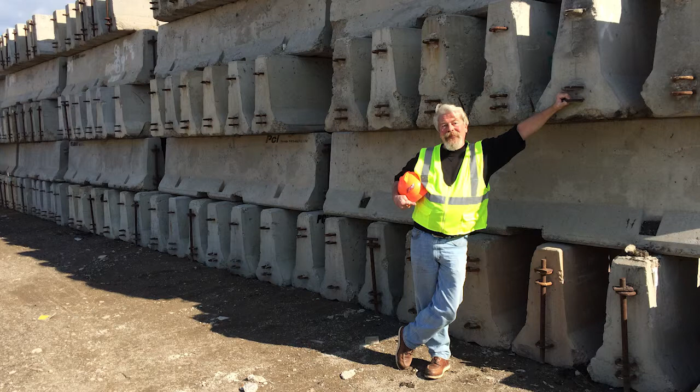Please enjoy the upcoming presentation and take ownership of these three disciplines: safety, environmental, and quality. Please feel free to comment on these topics as we continually work together to improve the design-build process. Thanks.

The design-build construction manager for this project is Rachel Wiedig.

PCiRoads is dedicated to providing MnDOT with a project that is designed and constructed in accordance with the Trunk Highway 2 Erskine Concrete Design-Build Project Conform Contract. Our goal is a project that is safe, buildable, environmentally sound, maintainable, durable, and functions for the traveling public.

To accomplish the above goals, we are committed to emphasizing the importance of a quality project to all project personnel. The quality management system establishes quality management processes and procedures, integrates quality goals of design and construction, defines standards and procedures for quality management, assigns the responsibility for specific quality management functions, establishes a process where quality is built into the product. All persons working on this project are responsible for project quality.

Success will be defined as providing a quality project, providing the understanding of quality, and project certification and acceptance.

Responsibilities: Contractor and all individuals working on the project are responsible for the construction quality of the project and for complying with the project scope of work and their quality manual. MnDOT is responsible for performing construction quality acceptance verification testing and inspection and auditing of the contractor's management system.

What is project quality? Constructing a well-designed plan means building according to the Release for Construction Plans, or RFC. Field Design Change, FDC, is a tool for correcting plan errors and making changes as necessary to match field conditions and documenting the changes. Examples can be moving catch basins to work around conflicts found in the field, moving rebar locations to allow for better placement, the addition of a cutoff drain to intercept water from a sand seam.

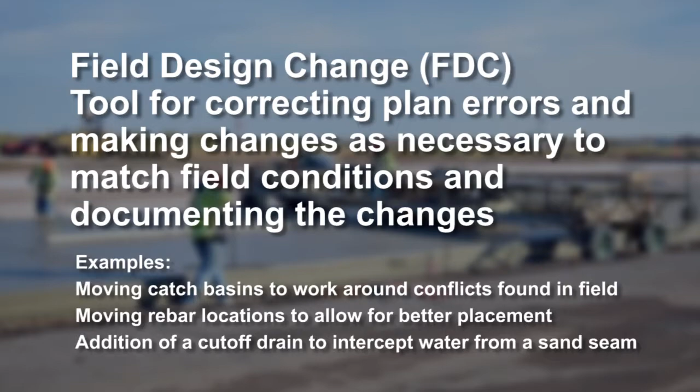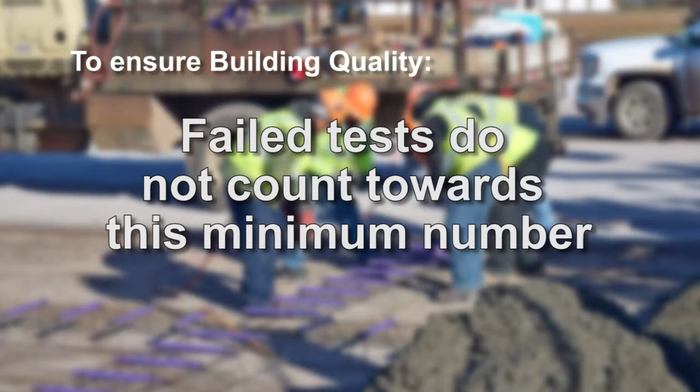To ensure building quality, all construction must adhere to MnDOT specifications and standards. All field and laboratory testing must be conducted and reach the minimum number of passing tests. Failed tests do not count towards this minimum number. Certify supplier material quality standards prior to incorporation of the material. Follow RFC plans. Communicate plan errors and resolve them at the appropriate level.

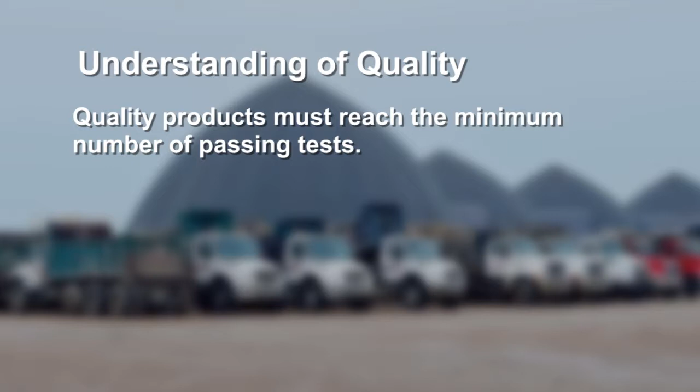Understanding of quality: this means the owner knows a quality product has been provided, and this is as important as quality itself. Quality products must reach the minimum number of passing tests. Testing frequency is contractual. The minimum number of tests to be taken is not optional. Failed tests do not count as a test. Any failing are documented and resolved.

Tools for providing understanding of quality include allowing for testing and inspection of all products to assure quality status. Quality incentives are in place to provide a superior product. An openness to communicate with the owner, MnDOT, helps facilitate understanding of quality.

The quality management process will perform sufficient inspections to assure compliance with specifications and the MnDOT schedule of materials control. This includes assuring that all personnel performing work on the project have the necessary experience, certifications, skills, education, and training to perform work affecting project quality.

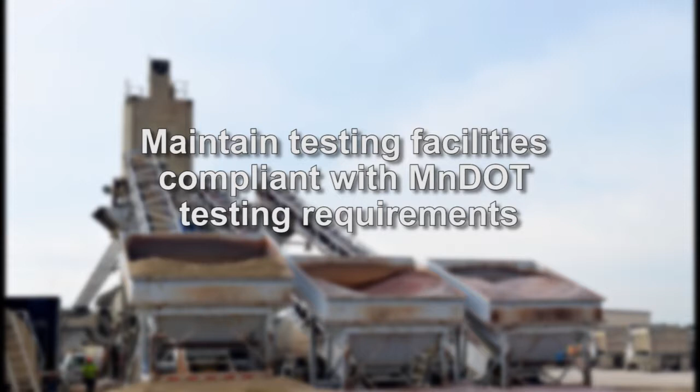Maintain testing facilities compliant with MnDOT testing requirements. Document purchase, receipt, storage, and protection of the materials on the project. Testing and inspection records are to be maintained and made available to MnDOT. Documentation and resolution of non-conforming work. Monitor post-design changes working with the construction team, inspection staff, and designers with the development of as-built drawings.

The foreman is the most important component of project quality. They must make sure that construction goes according to plan and specification, including adherence to MnDOT specifications and standards, achieving passing material test results by knowing all material types and placement, and using the right materials in the right place.

Request testing when needed or appropriate. Monitor moisture and density control throughout construction. Identify potential conflicts in plans for potential critical activity points.

A critical activity point is a specific point in the construction process at which further activity associated with the deliverable is suspended until formal acceptance of the interim product is obtained. Some examples include subgrade density and tolerance checked prior to placement of aggregate base, aggregate base density and tolerance checked prior to paving, and concrete forms and reinforcing steel checked prior to concrete placement.

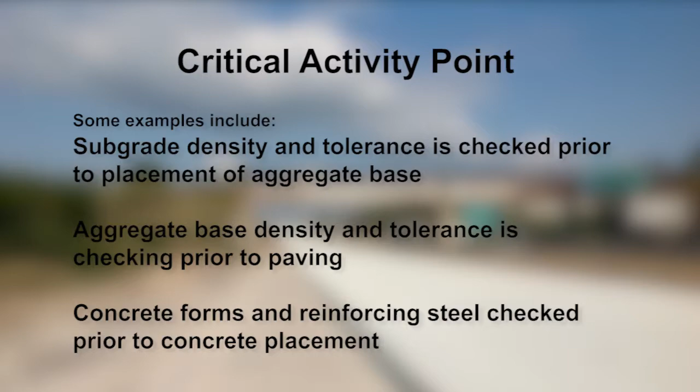The foreman will review critical activity point requirements with the critical activity point manager prior to verification inspection. They will correct any areas with failing test results and correct any items not meeting project requirements, such as rebar placement, loose rebar, or soft areas in the subgrade or base.

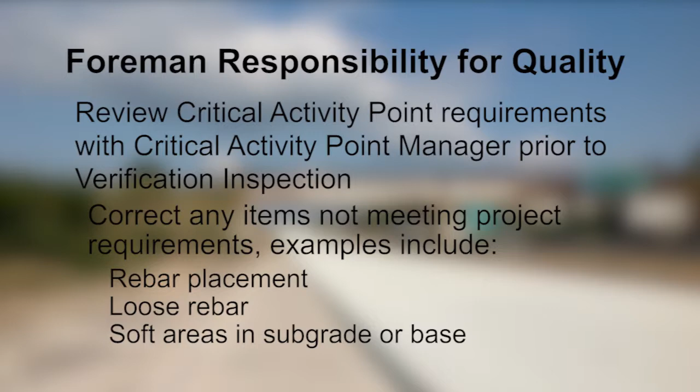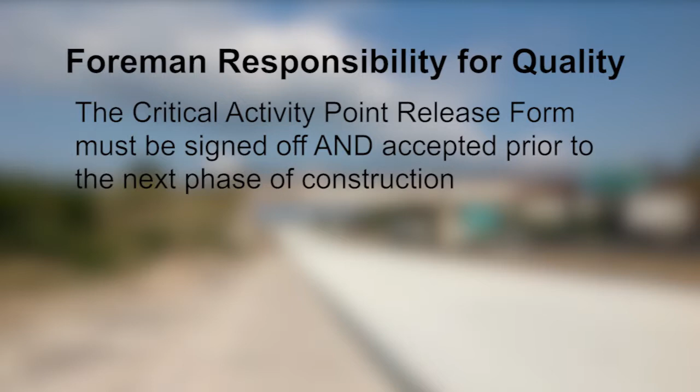The foreman will also communicate with the critical activity point manager and MnDOT verification. The critical activity point release form must be signed off and accepted prior to the next phase of construction.

Critical activity points must be signed off and accepted by the following: the Design Build Team Critical Activity Point Manager (CAPM), the Design Build Team Foreman in charge of the activity, and the MnDOT Verification Representative. All must agree that the critical activity point requirements have been met.

Materials delivered to the project are a critical activity point and must include the appropriate documentation prior to unloading. They also require inspection by the CAPM or quality inspector prior to incorporation into the project. Remember, quality is everyone's responsibility.

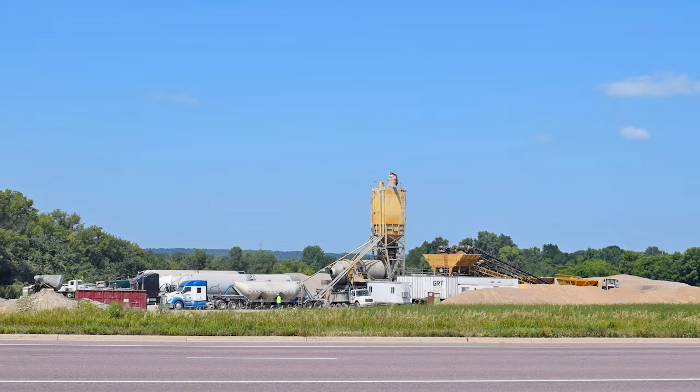The success of this project will not only be measured by how well we reconstruct the highway, but how well we meet our environmental requirements. As a condition of the project, we have committed to protecting the environment throughout construction. These commitments require permits and adherence to the conditions of those permits, including wetland permits and the NPDES permit for sediment and erosion control from the MPCA.

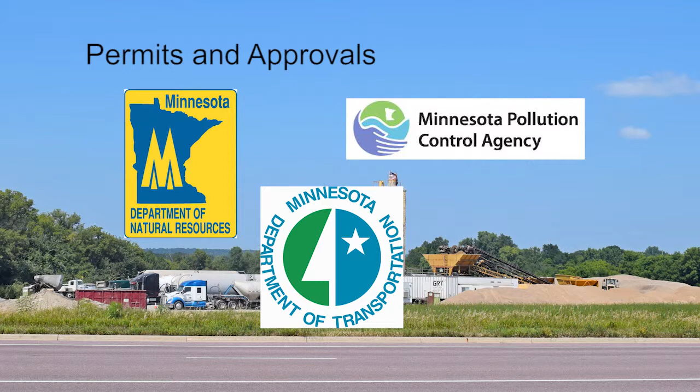These agencies and others will inspect the sites. Workers will be informed during toolbox training as to how to maintain compliance with the regulations for specific work activities.

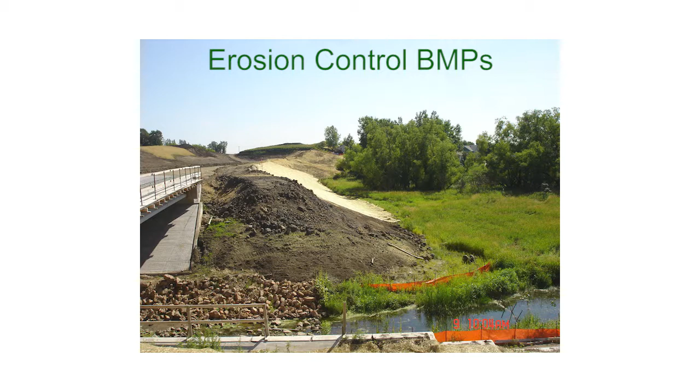In order to protect the project and meet environmental commitments, we will be installing various erosion and sediment control best management practices, or BMPs. Erosion control BMPs are the first layer of defense. It's easier to stop erosion than to try to capture soil particulates once they start moving in water.

Temporary erosion controls will include temporary seed and straw mulch or hydromulch, maintaining the existing vegetation for as long as possible, and if needed, using plastic tarps to protect the soils. Permanent erosion controls include turf and erosion control blankets.

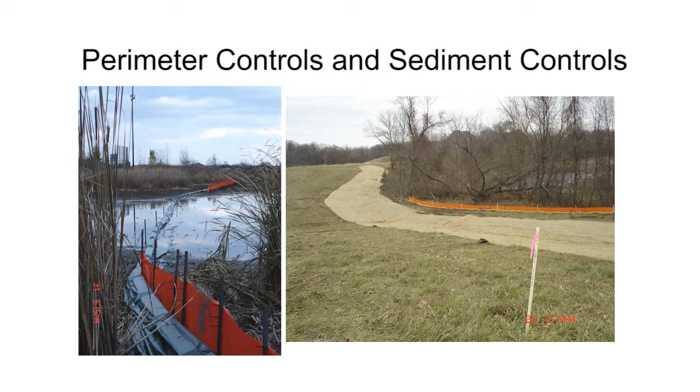Perimeter controls are the last line of defense. They will consist of silt fences, inlet protection, filter logs, and stabilized berms. All perimeter controls must be installed properly and maintained.

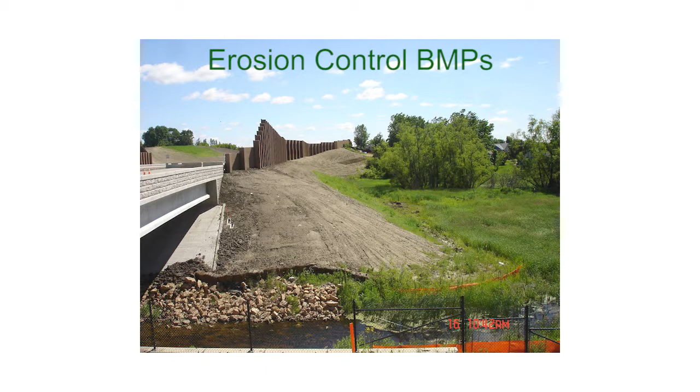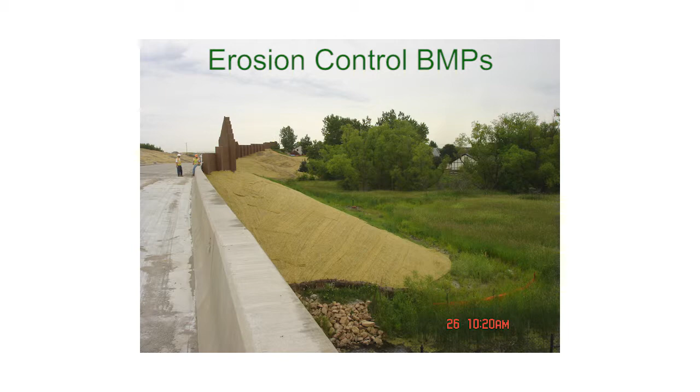Not all of these controls are done at the same time and may be implemented throughout the stages of construction, especially at a bridge site. Different controls can be done numerous times over the same area. You must not drive over or damage an area that has an erosion control blanket in place. Work with your supervisor if you need to enter these areas.

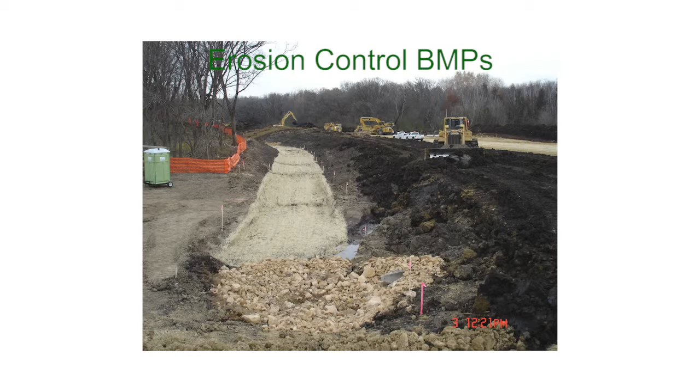All drainage ways that carry water off of the project must be stabilized within 24 hours of completion, so proper staging is needed. Temporary stormwater management is how clean water is kept clean as it goes through the site. Water bypass will be needed if concentrated flow passes through a work area.

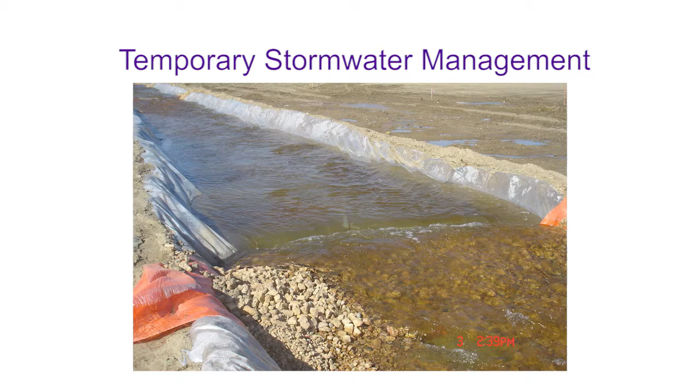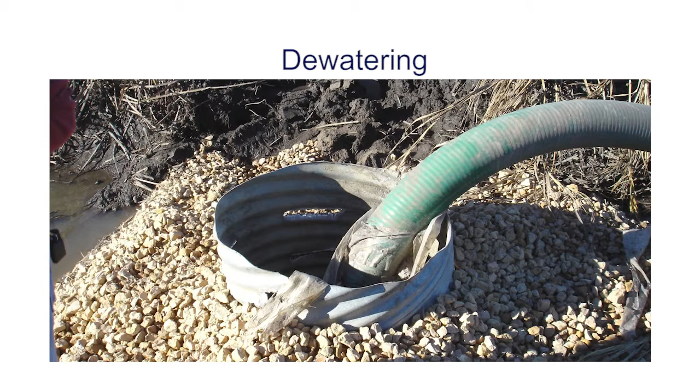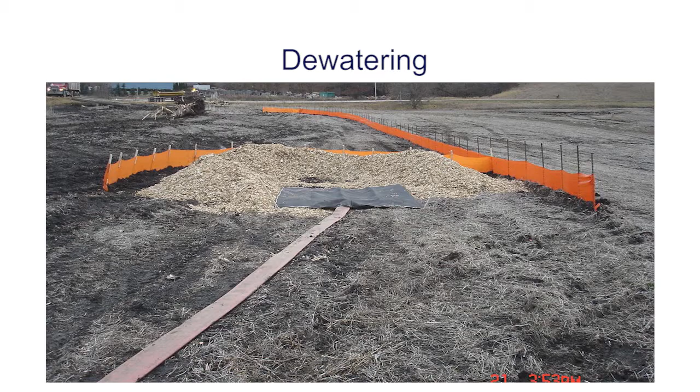If dewatering is needed, filter devices such as crushed rock sumps must be used on all inlet pipes. Energy dissipators must be used on the downstream side to avoid causing erosion to the receiving streams. There is no one-size-fits-all solution for dewatering, but all solutions must meet the goals of the permit. Dewatering must be done correctly with no shortcuts taken.

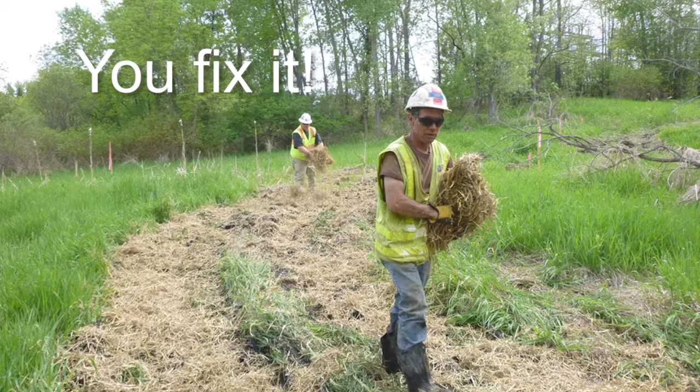Remember to stay within work areas and not drive outside of permitted areas. If you mess up an area, you must fix it. When in doubt about the area you are working in, make a phone call or talk to your supervisor.

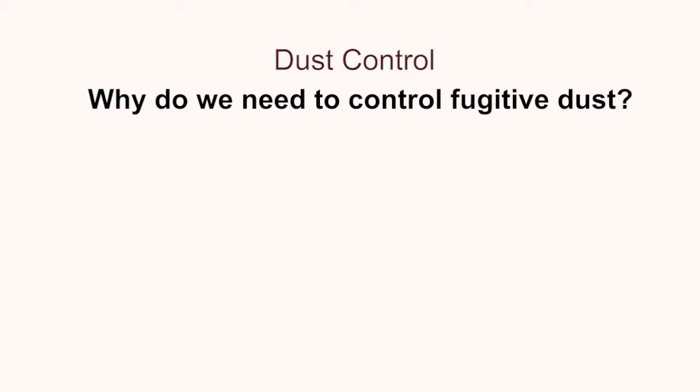Why do we need to control fugitive dust? First, it's bad for your health. It's also bad for the public's health. It creates nuisance conditions. And it's the law.

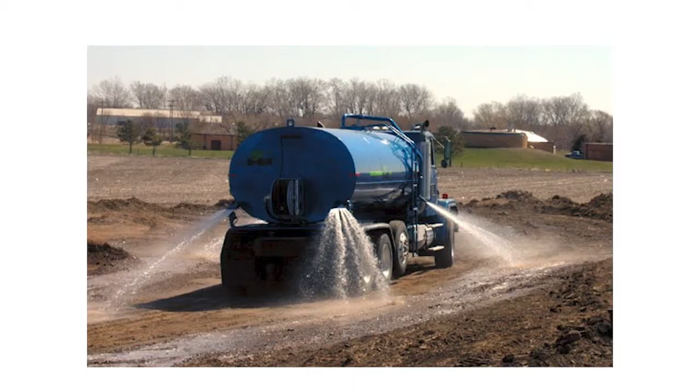If dust becomes a problem in your area, contact your supervisor so water can be brought on site to keep soils moist. Spills are a major problem as they impact water quality.

It is easier to prevent a spill than to try to capture it once it happens. If a spill does happen, contain it as quickly as possible. Spills must be corrected immediately and notifications made.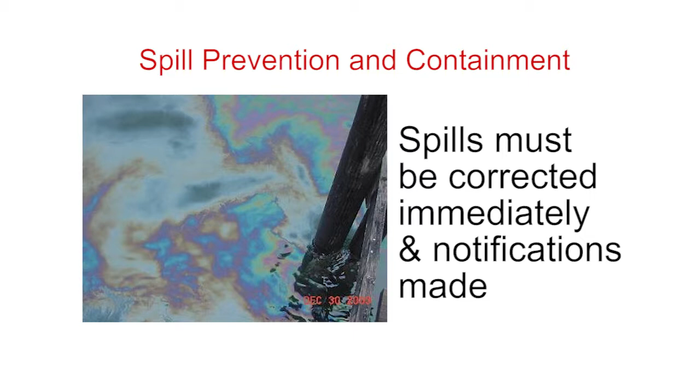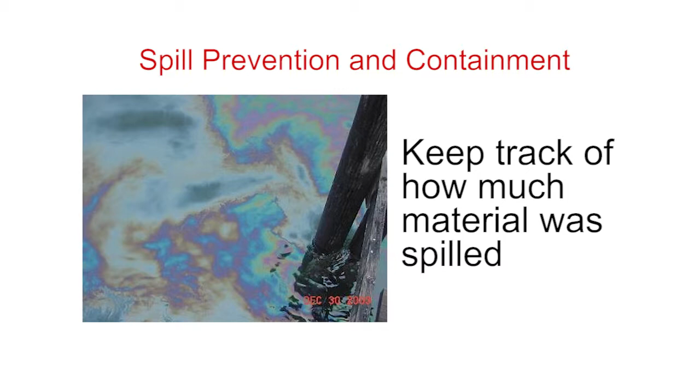If the spill is 5 gallons or more, contact the environmental compliance officer, who will report the spill to the state duty officer. Keep track of how much material was spilled.

Subcontractors must provide spill kits and notify all employees as to where they are available. Spilled material must be handled correctly. Know the requirements of your employer's hazardous waste plan and reporting requirements.

The easiest way to prevent a spill is to put oil-containing materials and any other chemicals in secondary containment or covered storage. Here we have drums on proper pallets or in secure containers.

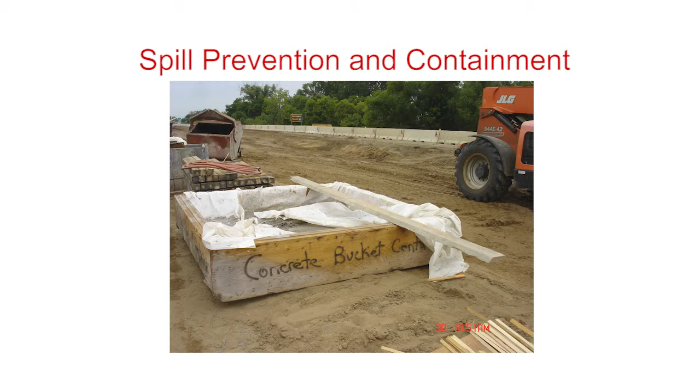Concrete and cement management is also a permit condition. Concrete washout must be done carefully and no concrete or slurry water spilled on the ground. All concrete washing is done into lined or metal tubs.

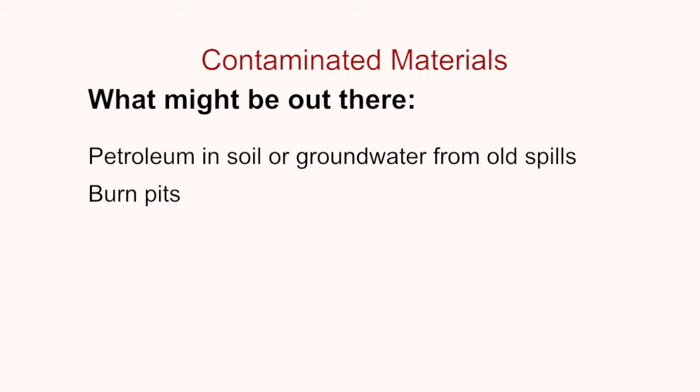Contaminated materials. Contaminants to look for include petroleum-contaminated soil and groundwater from old spills, burn pits from old homesteads or illegal burning, treated wood on guardrails, lead in bridge-bearing plates, asbestos-containing material.

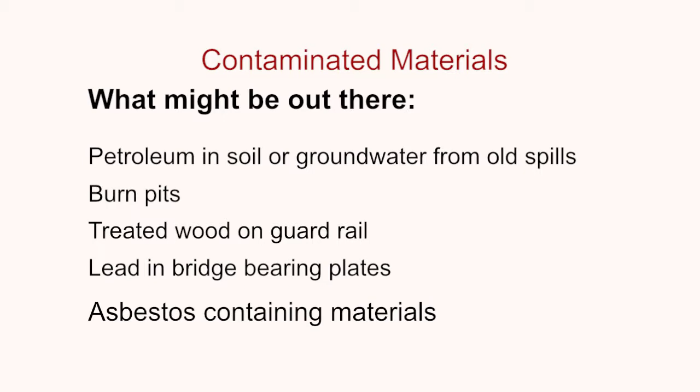Please note, do not touch asbestos-containing materials. An abatement contractor will do the removal. Proper handling of contaminated materials is covered in the Contaminated Materials Management Plan.

We just talked about known or suspected contaminants, but what about unknown materials? Here are some things to look for. Stained soil or stressed vegetation, which could indicate petroleum or a solvent spill.

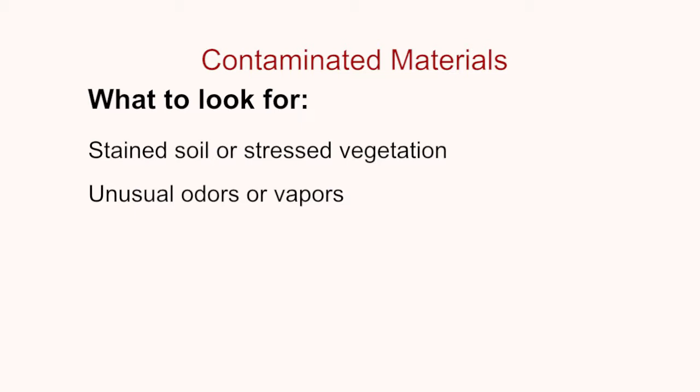Unusual odors or vapors, which could indicate wastes in soil or water. Oil sheen in water or puddles. Buried debris in the soil or illegal dump sites.

If we encounter contamination, follow the Contaminated Materials Management Plan. Use some common sense, like washing your hands before eating and drinking. For extra caution, change your clothes when you get home.

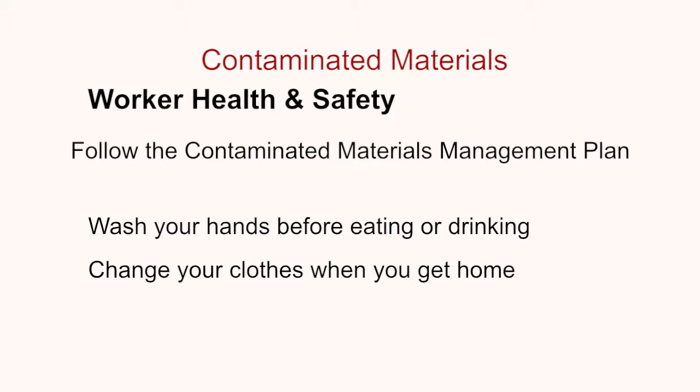If you find something unexpected, stop work. Secure the site. Call your site supervisor immediately. If contamination is found, we will follow the instructions of MnDOT's environmental consultant.

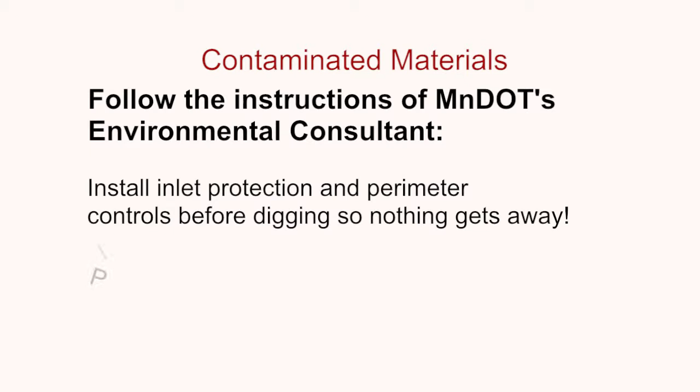Some precautions include installing inlet protection and perimeter controls before digging, so nothing gets away, placing contaminated soils on 10 mil poly and covering them, and following all proper material handling and disposal.

The consultant will take samples for testing. Work will not be permitted to continue until testing is complete.

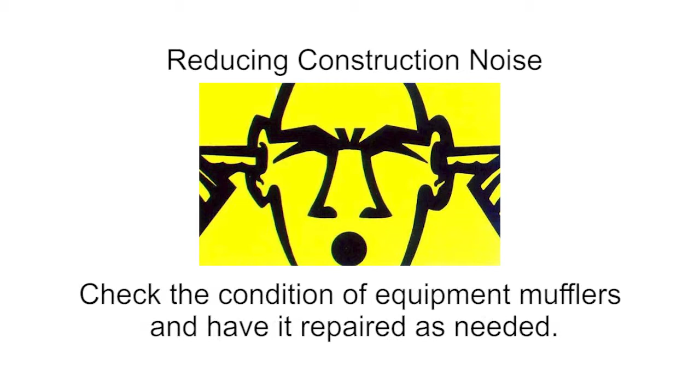It is understood that construction is noisy, but you are required to make every effort to keep noise levels down, including provide temporary noise shielding for noise generators near sensitive areas. Check the condition of equipment mufflers and have it repaired as needed.

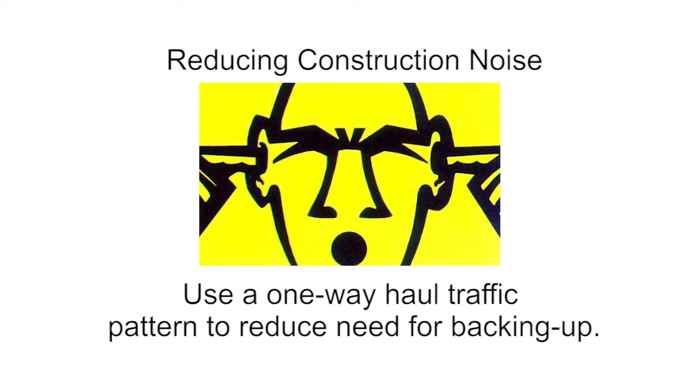Use OSHA-approved backup alarms. Use a one-way haul traffic pattern to reduce the need for backing up. Strictly enforce a no-slam tailgates rule.

The unexpected. What should you do if you find something unexpected on a job site? Stop work, secure the site, call your site supervisor who will contact the environmental compliance officer. Work cannot proceed until the all clear is given.

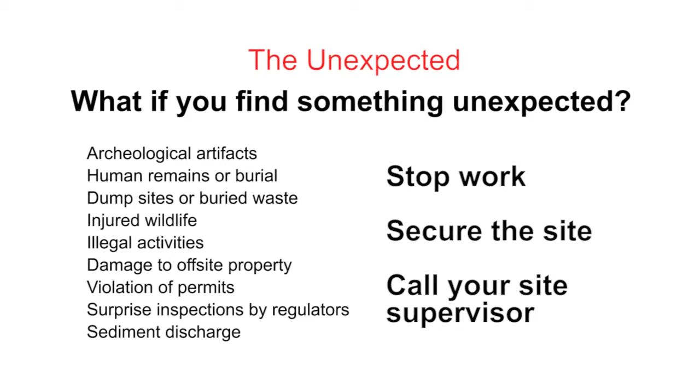The environmental compliance officer on this project is Tony Luft. The project's environmental compliance efforts are required by federal and state laws and permits, as well as PCiRoads' commitment to delivering a quality project in an environmentally sound manner. The success of this project requires the cooperation of every person on the site.

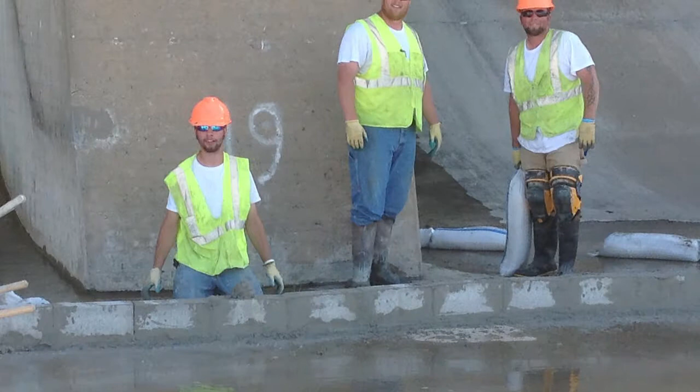For PCiRoads projects, it is each person's individual responsibility to be familiar with all safety and health practices outlined by the respective company's safety manual and plan.

Subcontractors are required to educate and train all employees and visitors before they enter the site. Subcontractors are responsible for providing safe working conditions and procedures and perform work in accordance with all applicable laws and regulations, the subcontractor's accident prevention program, and contract specifications.

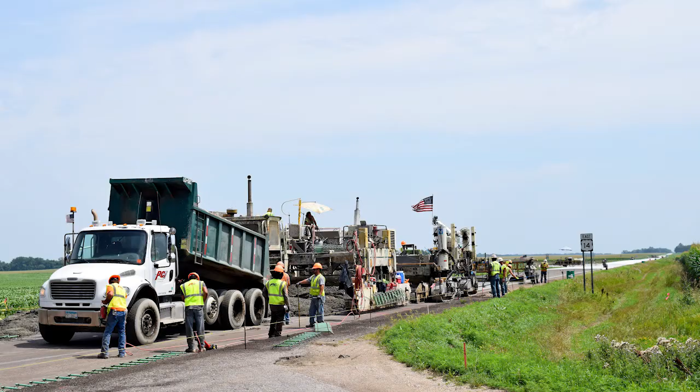All employees will be required to coach each other and visitors on the importance of safe operation and enforce the provisions of their safety policies.

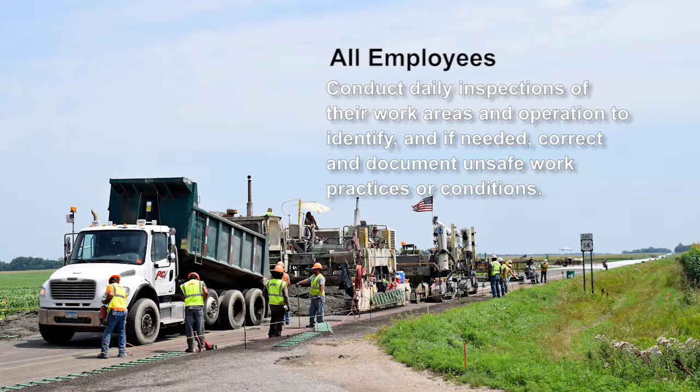Conduct daily inspections of their work areas and operation to identify, and if needed, correct and document unsafe work practices or conditions. Supervisors must investigate all accidents to determine cause and corrective measures.

Supervisors are strongly encouraged to fill out safety pre-task plan cards and complete a weekly site safety checklist. Supervisors must also assist in the development of job hazard analysis for each major phase of work and for all types of operations that have not been previously analyzed.

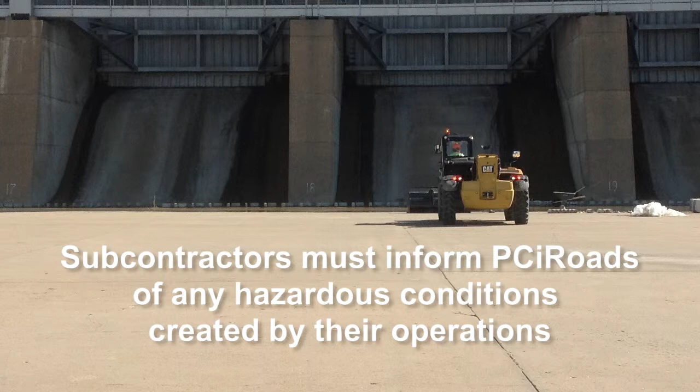All work operations must be performed using good judgment in compliance with OSHA regulations and all health and safety requirements. Subcontractors must inform PCiRoads of any hazardous conditions created by their operations.

Safety is everyone's responsibility. To ensure your safety, proper PPE is required at all times. At a minimum, employees must wear a hard hat, high visibility vest, and work boots while in all work zones.

You can help prevent accidents and injuries before they start by staying alert at all times, by being aware of your surroundings and situations that may cause or lead to accidents or injuries. Immediately notify your supervisor of all unsafe work conditions or acts. All unsafe conditions and hazardous situations must be corrected immediately. Fighting or horseplay will not be tolerated.

Safety meetings and training. Safety meetings with all supervisory personnel will be conducted by or at the direction of the project manager to review accident prevention efforts and results, along with safety policy and procedures pertinent to the work being performed. Supervisors will hold toolbox or tailgate safety meetings with their crew to discuss procedures, suggestions, past accidents, and educational materials.

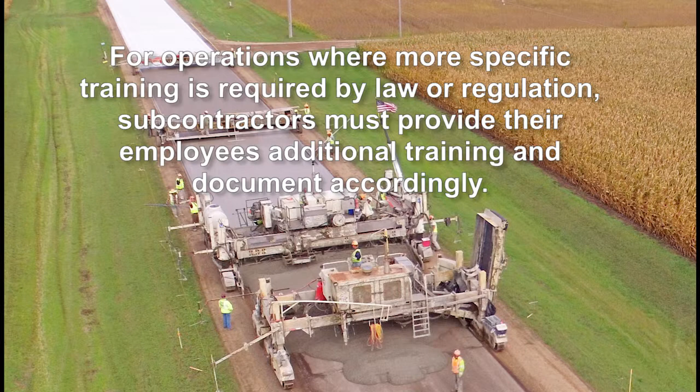Additional meetings may be held when there are crew changes or significant changes in job condition. This training will be documented and electronically submitted on a weekly basis to the project manager. For operations where more specific training is required by law or regulation, subcontractors must provide their employees additional training and document accordingly.

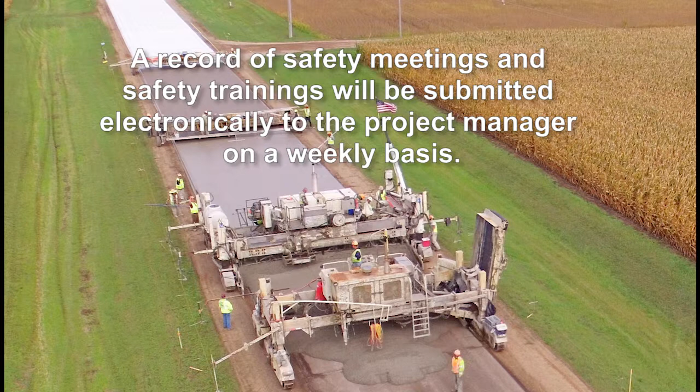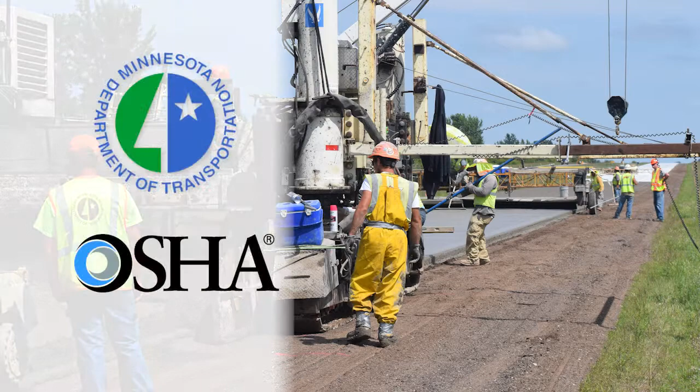Subcontractors will also participate in safety meetings held by PCiRoads when work within the scope of their subcontract is in progress. A record of safety meetings and safety trainings will be submitted electronically to the project manager on a weekly basis. It is the responsibility of all subcontractors, supervisors, and foremen to properly train their employees and make them aware of any and all hazards related to road and bridge construction. Proper training must meet MnDOT and OSHA requirements.

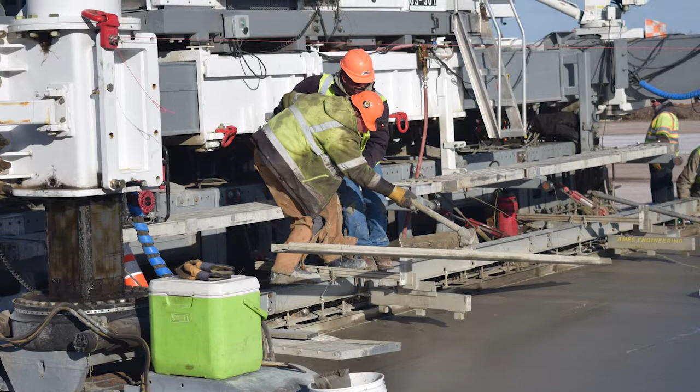Health and physical information. Employees should be physically capable of doing their jobs. Be sure to keep well hydrated and be aware of the changing environmental and work conditions around you. No person will knowingly be permitted on the job while under the influence of any substance, including alcohol, illegal drugs, controlled substances, and prescription or over-the-counter medications.

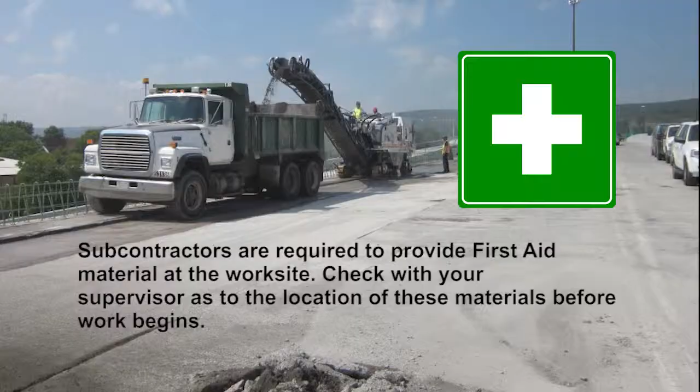Subcontractors are required to provide first aid material at the worksite. Check with your supervisor as to where these materials are located before work begins. At least one employee per subcontractor must be trained in first aid and be available at all times to render immediate treatment. Report all accidents, injuries, and illness to your supervisor immediately, regardless of how small or minor they may seem. Please note that immediately means the same day the injury occurred.

If an employee is injured on the job, that employee's immediate supervisor must complete a first report of injury form and, if needed, a claims report, and turn it into the project office on the same day the injury occurs. Accidents and injuries must also be reported to the project safety manager immediately. Please note the medical services available for this site. These will be posted in the main field office and should be regularly reviewed and discussed at the toolbox safety meetings.

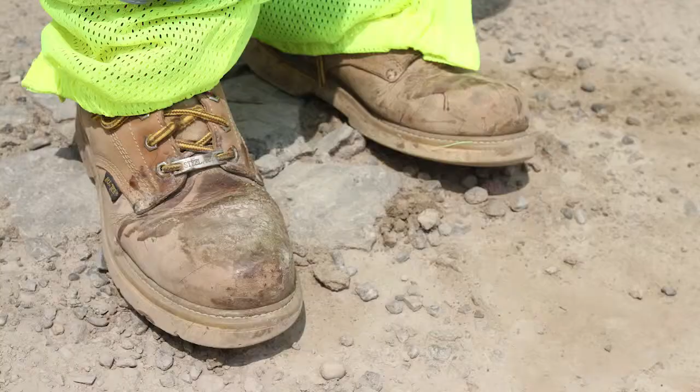Safe work practices, personal protective equipment. All employees must be properly clothed while on any PCiRoads worksite. This may include ANSI approved hard hat and vest, proper footwear, proper hearing protection and protective eyewear, high visibility traffic vests, and full-length pants and a shirt with sleeves. Also, wear gloves if needed.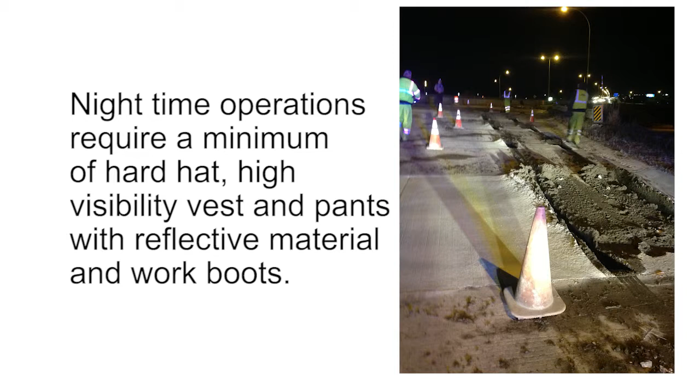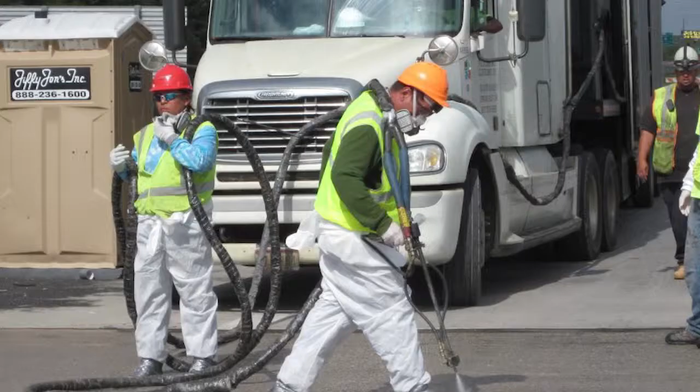Daylight operations require a minimum of a hard hat and high visibility vest and work boots. Nighttime operations require a minimum of hard hat, high visibility vest, and pants with reflective materials and work boots. When needed, all subcontractors must develop and implement a fall protection plan in accordance to OSHA standards on fall protection. Approved respirators must be worn when operations or conditions create hazardous levels per OSHA standards. Employees required to wear respirators must have received respirator use training, fit testing, and an annual medical evaluation.

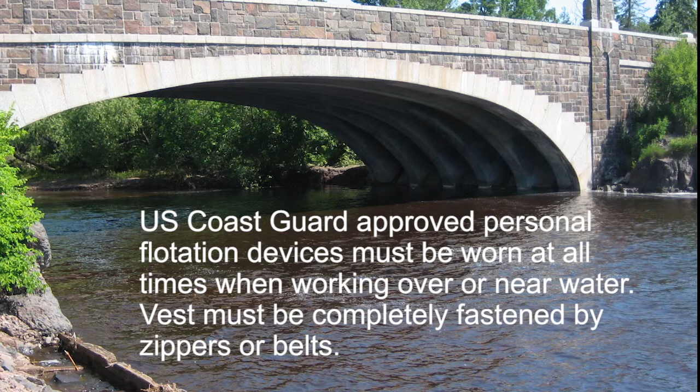Safe work practices, water hazards. When working over or near water, U.S. Coast Guard approved personal flotation devices must be worn at all times. The vest must be completely fastened by zippers or belts. A ring buoy with at least 100 feet of attached rope must be placed adjacent to the water where the danger of drowning exists. And a boat with the proper equipment must be placed at water's edge per OSHA standards. Please refer to OSHA's guidelines for working near water hazards.

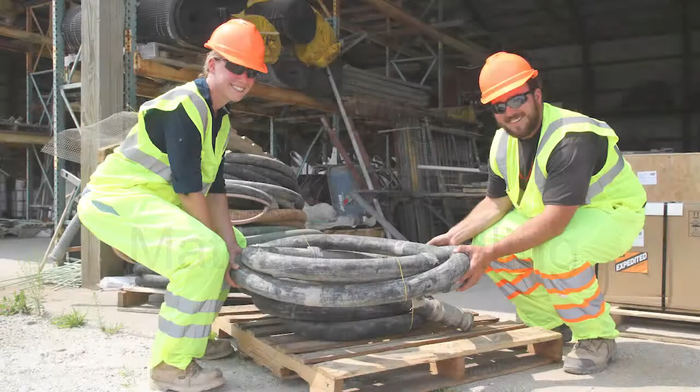Material handling. Proper lifting and material handling must be followed at all times. Subcontractors must train their employees on proper lifting and material handling techniques. Manual heavy lifting should be avoided whenever possible through the use of power equipment. PCiRoads requires the proper use of power equipment to move and lift materials. Hazardous materials must be transported in such a manner to reduce risk of spills or contamination. All hazardous materials must be properly marked and secured at all times. Please note all requirements for handling hazardous materials.

No work activities or processes are allowed within 50 feet of the track center line while trains are passing through the worksite, unless specifically authorized. Personnel shall always, where possible, stand at least 20 feet back from the tracks to prevent injury from flying debris or loose rigging. Also, personnel shall observe the train as it passes and be prepared to take evasive action in the event of an emergency.

Personnel should not walk, stand, or sit on the rails. As the rail surface can be extremely slippery, personnel must step over the rails when crossing tracks. Personnel shall also be aware railroad ties can be slippery and that railroad ballast can shift while walking on top of it. Personnel shall not foul the track with any piece of equipment without a CP flag person and proper protection. Certain projects will require the assistance of a qualified flag person. The decision as to where flag persons are required rests with CP.

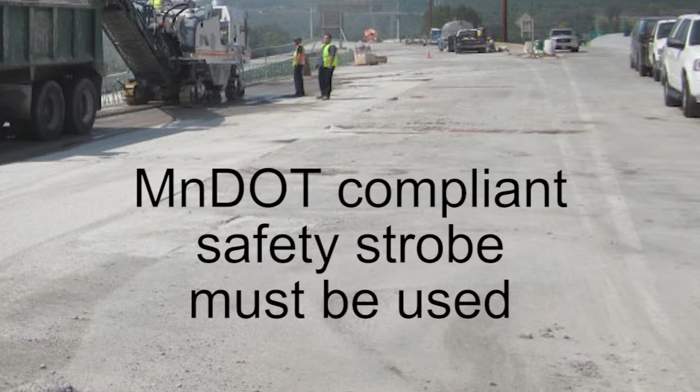General workplace safety. When arriving on a work site, park your personal vehicle as directed by your supervisor. Keep clear of the traveling public and other contractors' work zones. If traveling occurs in the construction zone, a safety strobe compliant with MnDOT specs, or emergency flashers at the least, must be on. This is very important at night.

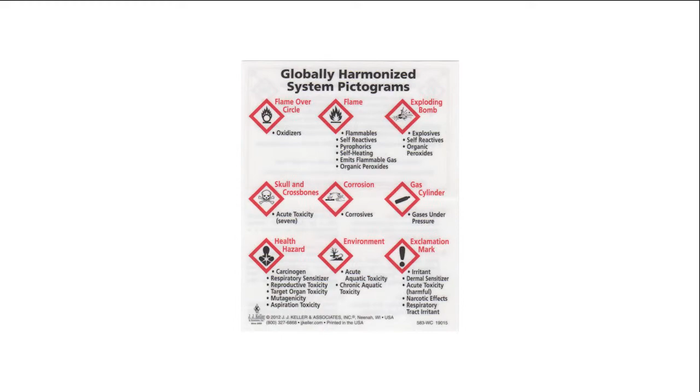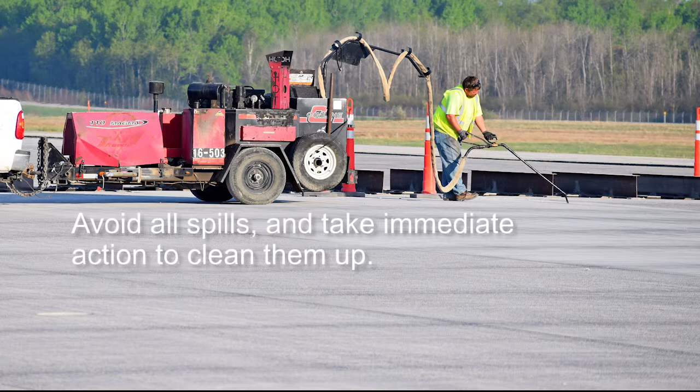Observe all warning signs and tags posted on the job site and any equipment. These signs identify hazards that could cause accident or injury. All employees must be familiar with the Globally Harmonized System of Classification and Labeling of Chemicals, or GHS, commonly known as MSDS. Be sure to wear all required PPE and communicate with vehicle and equipment operators to be sure they know where you are. Do not assume they see you. Also, keep your area clean, avoid all spills, and take immediate action to clean them up. Understand and follow all reporting procedures for hazardous material spills.

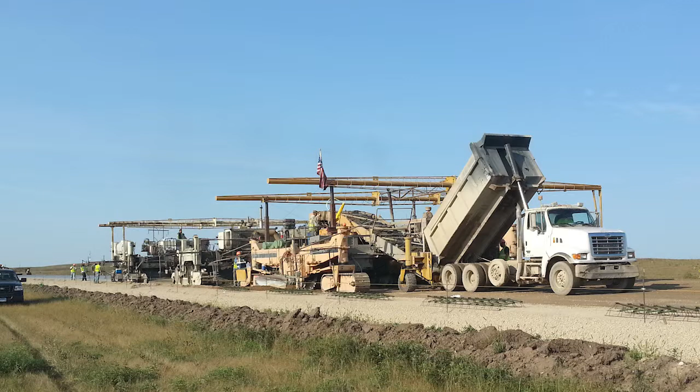Tool and equipment safety. Be sure to follow all safety requirements for tool and equipment operation found in your employer's policies. General safety includes: before using any tool or piece of equipment, check to be sure it is in safe operating condition. Only use tools and equipment for their designated purpose. Equipment operators are responsible for the safe setup and operation of the equipment. Be sure to follow all lockout-tagout policies in your company's safety manual.

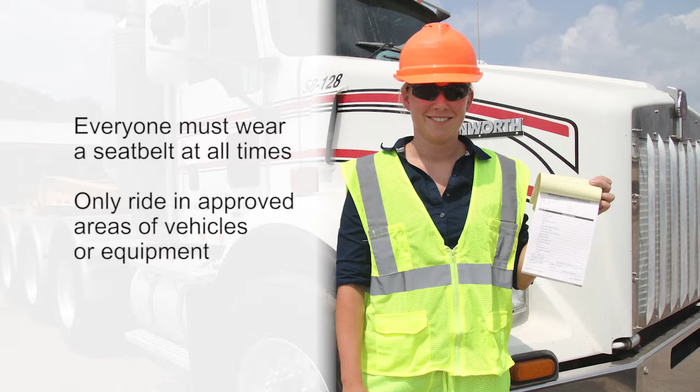Vehicle and equipment operation safety. Be sure to follow all safety requirements for vehicle and equipment operation found in your employer's policies. Wear seatbelts at all times, including operators and all passengers, and only ride in approved areas of vehicles or equipment. Be aware of power lines, especially those that are low-hanging, and incorporate any pre-planning necessary when working in and around power lines. This is especially important while working at night.

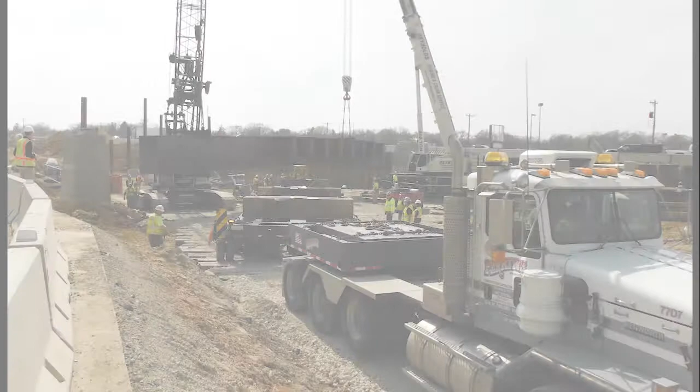All trucks rated as commercial vehicles can only be operated by employees who possess a valid commercial driver's license, or CDL. Vehicle operators should never work under or near boxes without safety jack stands in place. All crane operators will be required to have an applicable CCO certification for the cranes they are operating. All vehicles and equipment with obstructed views to their rear must have audible backup alarms operational.

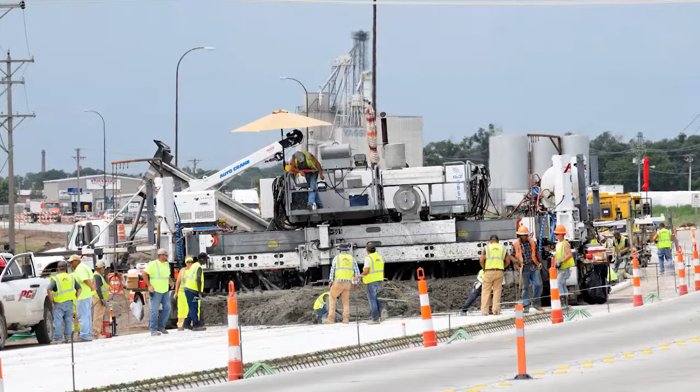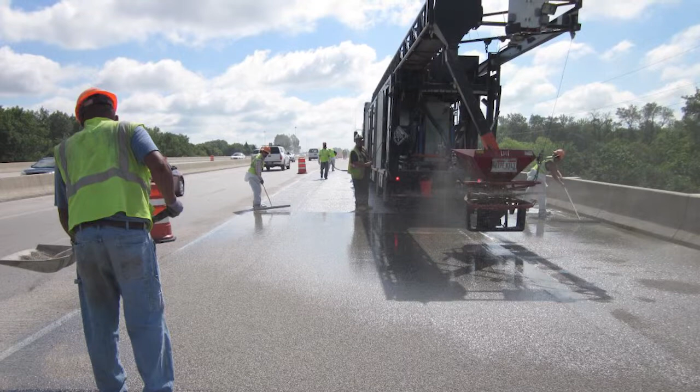Public safety. It is important to remember to keep the public safe on this or any work site. This job is in a high traffic area where cars can break down. Always be on the lookout and know what to do should an unexpected person be on the job site. Great care should be taken when working in and about traffic. Adequate traffic control must be in place whenever work activity will impact public traffic ways. Please refer to your employer's safety plan for working with public traffic.

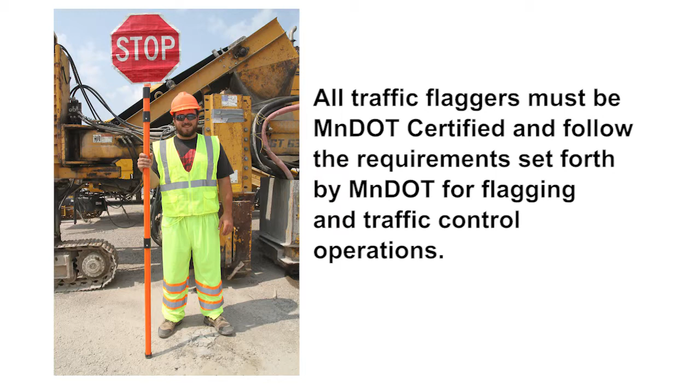All traffic flaggers must be MnDOT certified and follow the requirements set forth by MnDOT for flagging and traffic control operations. If it becomes necessary to delay, detour, or otherwise inconvenience the public, every effort will be made to do so as courteously and safely as possible. If necessary to operate on existing roads outside the construction area, all necessary permits must be obtained by the subcontractor from the appropriate public or private authority.

When excavation is needed, you must contact Gopher State One Call at least two business days before an excavation occurs. Send locate tickets to utility operators with underground facilities near your dig site. Please note, subcontractors are responsible for their own locates. If a gas line is ruptured, call 911 immediately. Contact the utility, cordon off the area, and begin an evacuation. Contact the project manager immediately for all utility hits.

Visitors will not be permitted in the work area without clearance, unless accompanied by proper escort. Visitors must complete all proper training per subcontractor policies. Visitors will wear appropriate personal protective equipment.